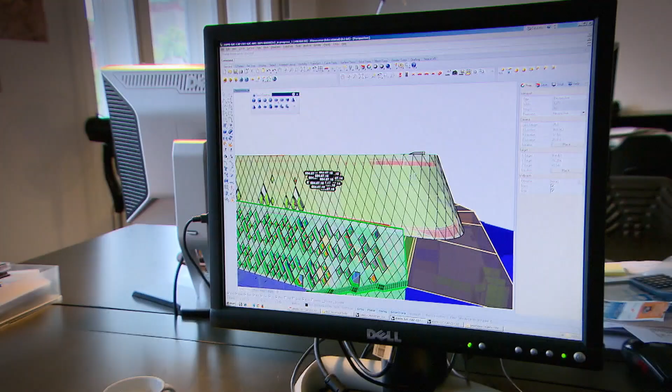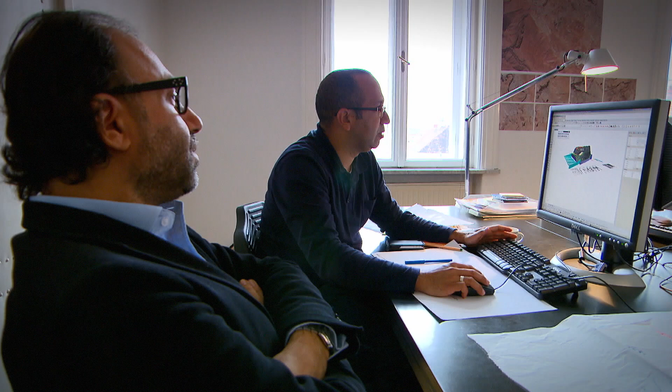The Emirates are a country that is actually quite open to new ideas. They literally hunger for them. They found our building design very refreshing, and made in Austria is something they equate with superior quality, as something of good quality, as a novelty.

Sustainable building is a well-established tradition in Austria, but Abu Dhabi is just beginning to recognize its importance for the future. In the Emirates, the issue of sustainability is linked to the country's poor reputation for having a large carbon footprint. We remember seeing billboards on the streets that said, 'We have the largest footprint,' so it's not something they're very proud of.

The United Arab Emirates is one of the 10 richest oil countries in the world. Where small villages stood a mere 50 years ago, booming metropolises now rise. Within a single generation, the Bedouins and pearl divers of yesterday have become business people and bankers.

Of the 8 million people who live here, only 1 million were born in the Emirates. They are well taken care of, paying no taxes and receiving many benefits from the government, sometimes even money, cars, or homes. But allegiance, money, and social peace must last after the oil is gone, and steps are already being taken. While Dubai is focusing on tourism and commerce, oil-rich Abu Dhabi is also pursuing renewable energies.

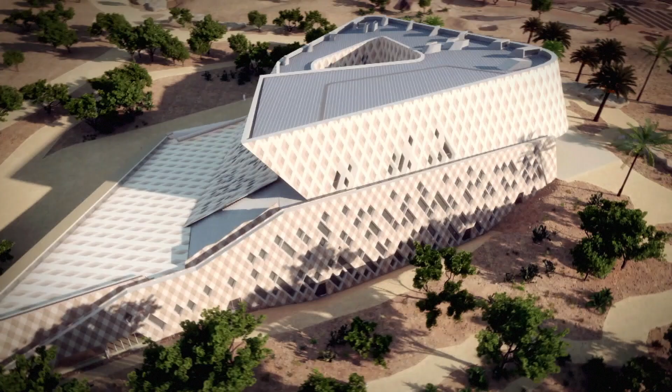The vestibule is beautiful. It always stays nice and cool, despite outside temperatures of up to 50 degrees Celsius in summer. This is due to the pleasant draft, even during wind-still conditions. We designed the vestibule to have these thermal qualities because we knew there could be a large number of visitors gathered here at times.

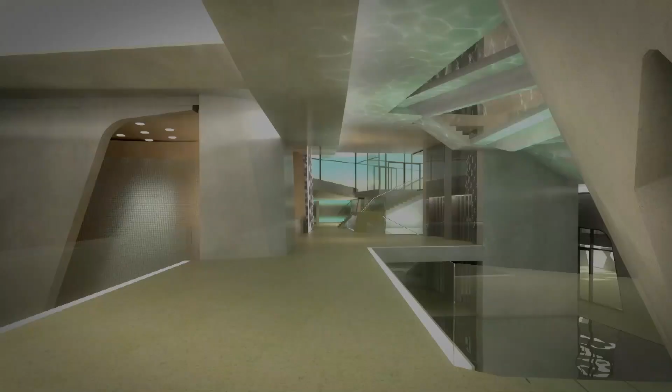Twisting 20 meters up into the sky, the building resembles a walk-in sculpture. Prior to planning the building, the architects studied the topography and culture of the region, as well as the latest international urban development concepts.

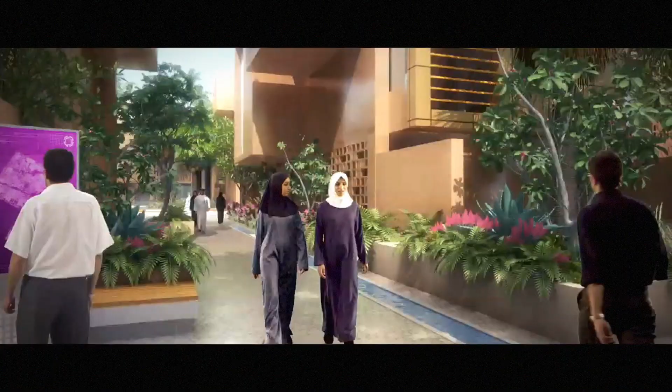Regarding the city of the future, I observe two tendencies here. One tendency is that there are two tendencies regarding the cities of the future. The first is the attempt to reshape megacities into lots of small units or little villages—the city as an agglomeration of many compact and manageable areas, with pedestrian zones and short distances to get around. On a larger scale, however, these areas are still interconnected.

The other tendency we've noticed is the rise of city marketing, where each city is trying to position itself in the world.

The Chalabi brothers lived in France, Geneva, and Baghdad with their Iraqi parents before moving to Austria. They studied architecture at the Vienna University of Technology and later taught it there as well. In planning the museum, they relied on a number of innovative building technologies that were developed and tested in Austria.

But will they work in the desert?

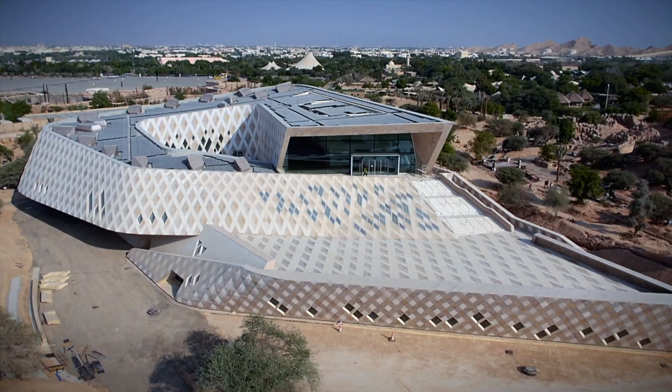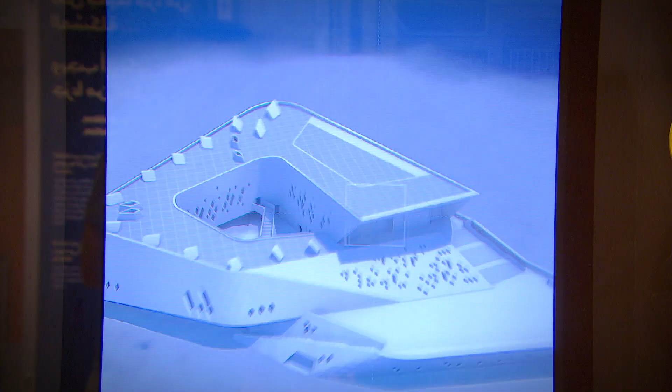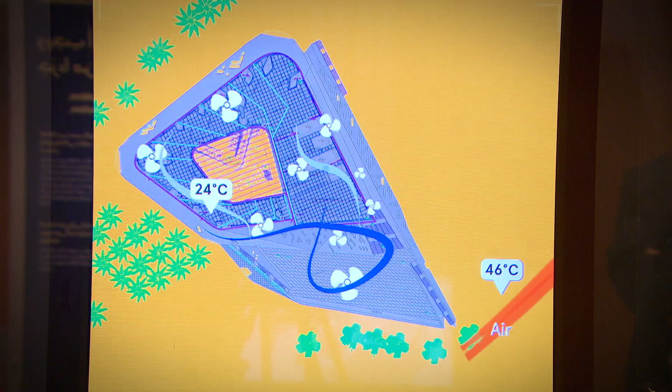The biggest challenge is protecting the museum against the scorching heat. For this reason, a third of the building is set deep below the desert sand. The supply air for the ventilation system is pre-cooled underground using 9 pipes measuring 800 meters in all, as well as a geothermal heat exchanger. The 25 megawatt hours of annual electricity savings derive from a method that has long been applied in Austria, although there it is used to preheat air.

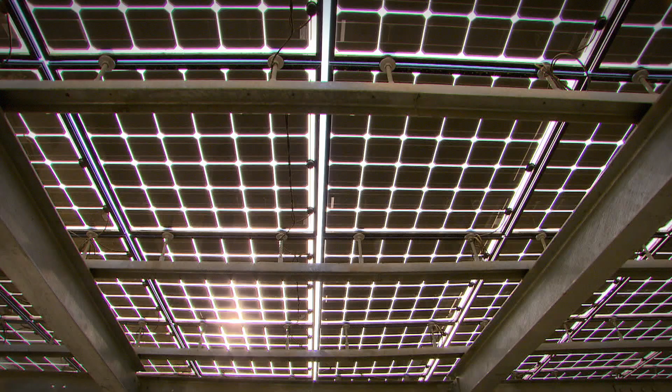The lighting design and building simulation, the photovoltaic modules, the solar collectors, as well as the building's technical and electrical equipment - all of these components were developed and supplied by Austrian companies.

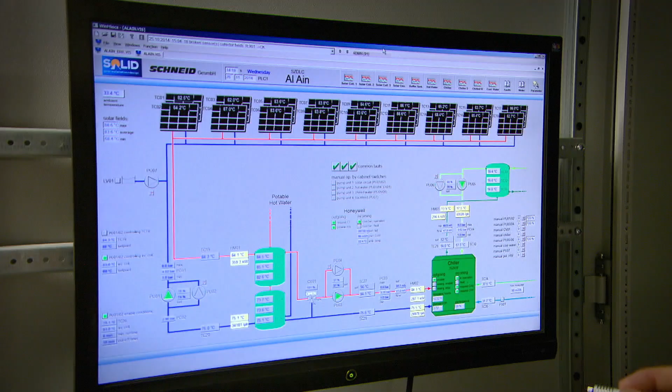The museum is air-conditioned using solar power and a cooling system from Styria. The boiling hot water from the solar collectors drives the chiller, where cold water is produced and then pumped through a network of pipes in the ceilings and walls.

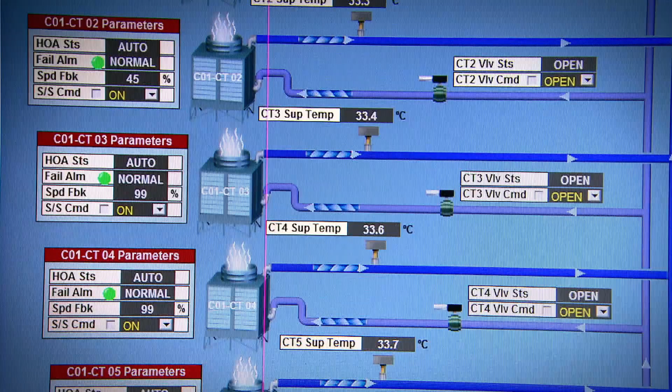The architects have managed to harmoniously balance innovative high-tech solutions and traditional elements in the new building.

Emiratis perceive the building as nearly traditional. We've even heard them say it reminds us of our values and building styles. And that's fitting because we adopted many elements from the traditional architecture and then just put them into a new package.

The museum is still in trial operation, but will open soon. Already, the Desert Learning Center is viewed as a model building for the cities of tomorrow.

Sustainable construction used to be a niche topic, but today it is a hot issue everywhere. IRENA, the International Renewable Energy Agency, has its headquarters in Abu Dhabi. Established in 2009, IRENA's mission is to promote renewable energies for the cities of the future.

You have a situation where you have half the world's population living in 2% of the world's land, consuming 75% of its resources. This is a transformative moment of global change that requires a response which is equal to the scale of the change that we are seeing.

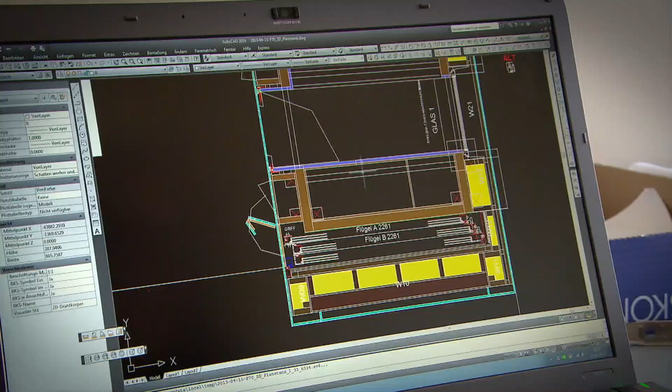But what does a city of tomorrow look like? Especially in the buildings sector, there is an immense potential for savings. Researchers and students are therefore focusing on developing plus energy houses, or buildings that generate more energy than they use over the course of a year.

Students at the Vienna University of Technology are designing such a plus energy house. Their intention is to compete at the world's preeminent green building competition, the Solar Decathlon in California.

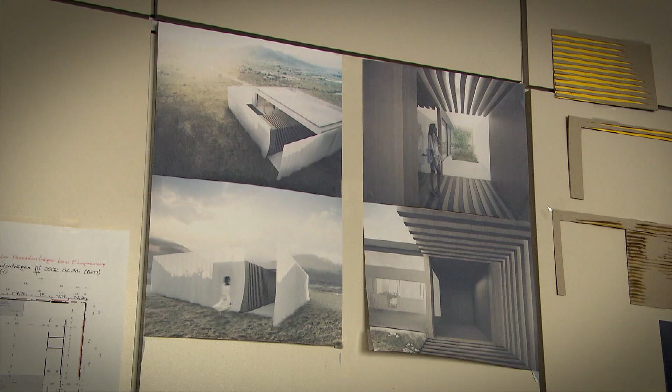Participating in this competition is very rewarding for the students. They don't usually get to build a house from start to finish, but now they're involved in all phases: planning, designing, building, furnishing, and even presenting it.

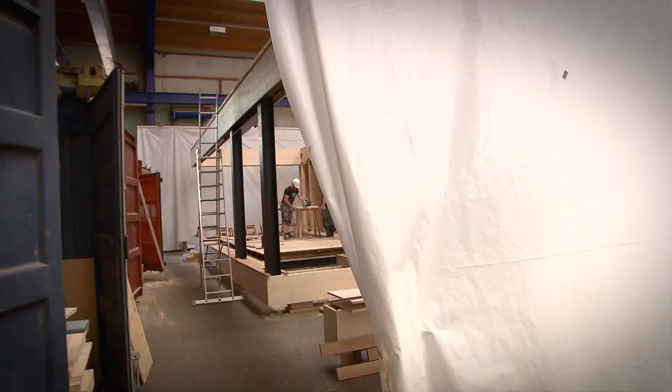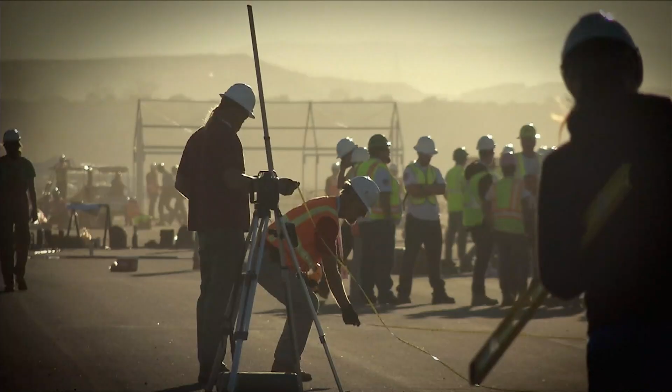The students are prefabricating their house in a construction hall in Carinthia. They must build it on their own, as prescribed by the strict competition rules. The wooden house is then shipped in containers to Irvine, near Los Angeles, where the Solar Decathlon is held. Now consisting of 48 students, Team Austria has only 9 days to assemble the house.

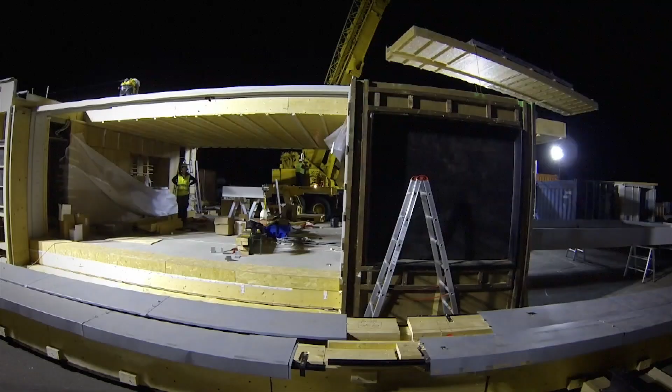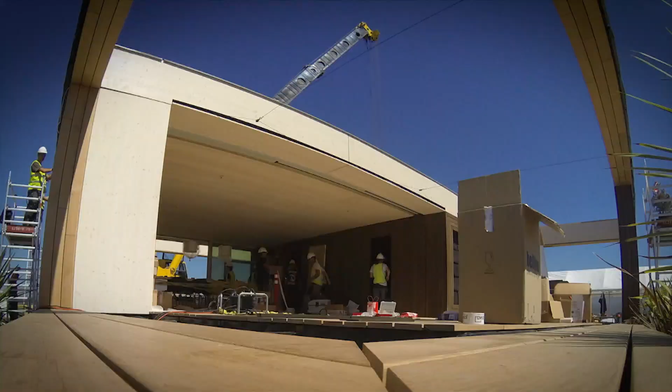The Solar Decathlon is a competition patterned after the Olympic decathlon, but for futuristic solar homes. Out of 150 university teams from around the world, only 19 have made it to the finals. It is the first time ever that an Austrian team is participating.

The Solar Decathlon is the world's preeminent competition for sustainable building, and many Americans wouldn't want to miss it. What they get to see here is definitely futuristic: modular homes whose components slide apart on rails, houses that look like tin shacks or haystacks, but which are actually technical masterpieces. In all, 300,000 visitors will take a look at these homes of tomorrow.

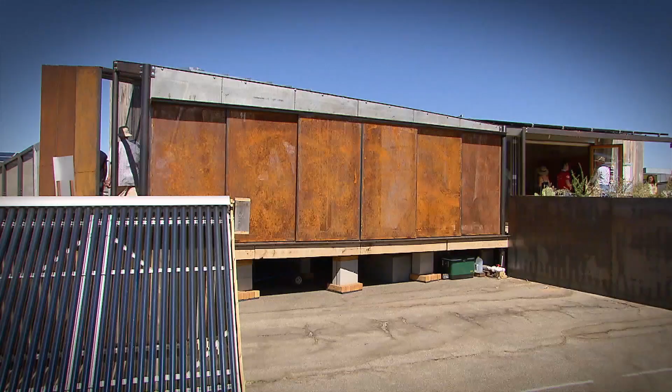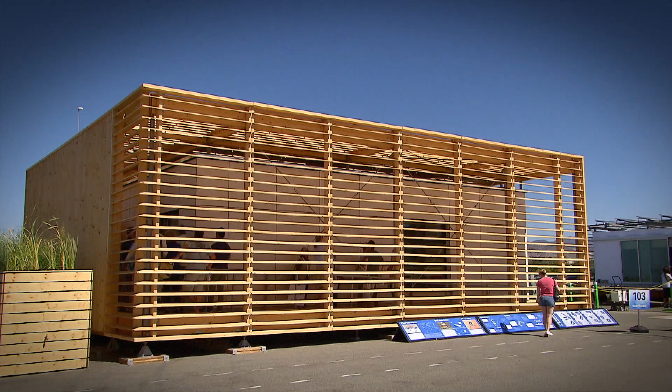The U.S. Department of Energy organizes the competition, and only students may participate. During the next several days, the teams will compete in 10 different disciplines. The vision behind the students' work will now be put to a practical test.

And now you can take a look inside. The Austrian team's house can be used as a standalone home or within compact urban development areas, and it is well received.

People seem to love it, and some even want to move in. Many have asked us if they could buy it. We already had 900 visitors this morning. Everyone was very enthusiastic, which is great, because we put two years of hard work into it.

We're ranked somewhere in the middle right now, but there are more contests to come, and we should do quite well in those. During guided tours of the house, the students impart their knowledge to the attentive visitors.

If you look at places like California, which is one of the most innovative places in the world in terms of technical learning, in terms of governance structures, in terms of how cities are organizing themselves, they are feeling the pressure from energy and water. But then you see in other resource-rich areas where that pressure hasn't yet come to bear, cities feel they can postpone the change. But it's only a matter of time before it comes. My advice to them would be that if you defer change today, it's going to be much more expensive and painful further down the road. We need to act today.

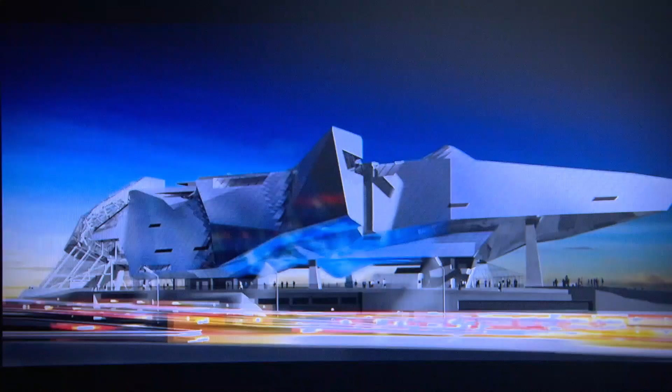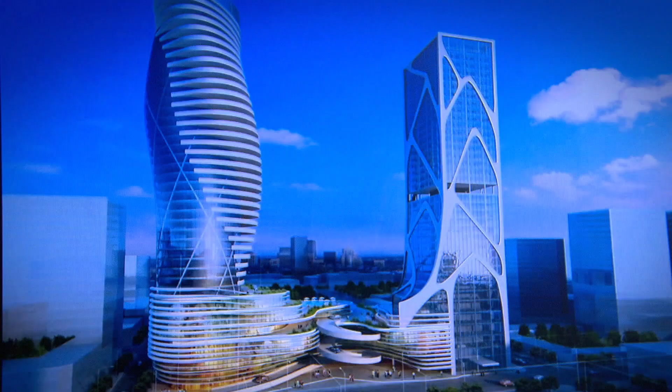Renowned architectural firms the world over are working on concepts for redensifying our cities. A key goal is to make not only individual buildings, but entire urban quarters into energy producers.

The Viennese firm Coop Himmelblau, too, is investigating ways to stop urban sprawl in Los Angeles, while at the same time generating renewable energy.

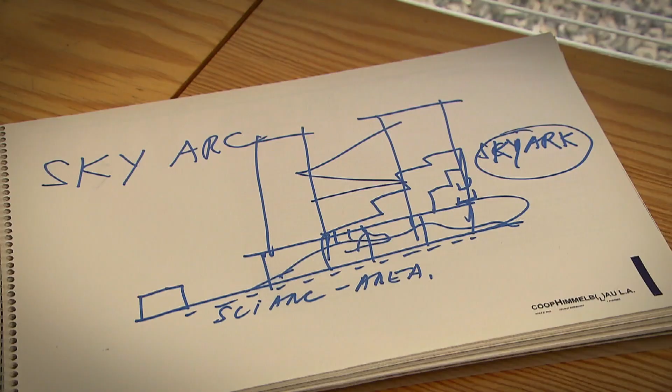The idea is to create small hubs that supply their surrounding area with energy. These energy hubs will function like small city power stations. In the lower zones, we use geothermal energy. And in the next layer, we use the sun, especially solar thermal energy, to generate heat. This is possible on the available surfaces of balconies and on south-facing building facades.

Then there's the layer where we make use of the sun to generate electricity with photovoltaic cells, for which the buildings are optimally positioned. And in the highest layers, we use the wind to generate electricity because that's where the highest wind speeds are found.

Urban planners from Los Angeles even came to Graz to take a look around. Here, less than 2 kilometers from the city center, 2 new urban quarters are being planned. Hans Schnitzer, the research coordinator, explained the concept to the US experts. In Graz, too, the plan is to redensify the city.

On an international scale, Graz is only a small city, definitely not a megacity, but we also face significant challenges. The current population is around 280,000, with another 3,000 to 4,000 people moving here each year. So by 2050, we can expect the population to grow by 100,000. That's 100,000 more people in need of living space, jobs, and utilities. And if we don't plan ahead, it will also mean around 70,000 more cars, which is simply inconceivable.

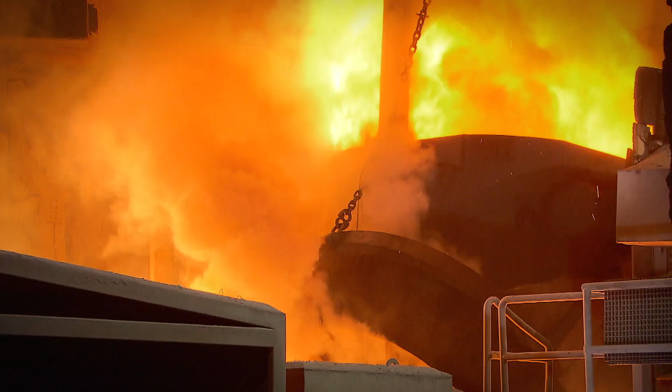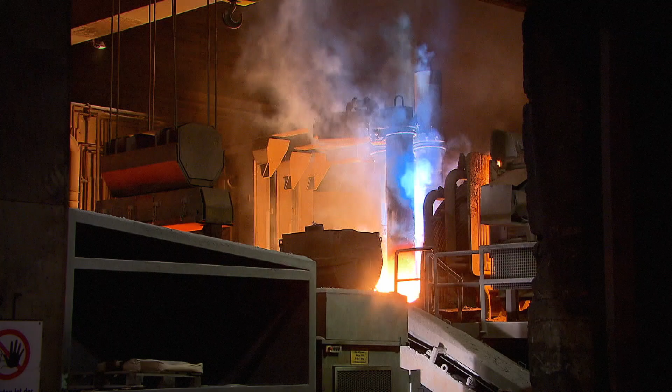A good precedent already exists: the Marienhütte steel and rolling mill in the center of Graz. Virtually unnoticed by nearby residents, the mill turns scrap metal into 400,000 tons of steel annually. As an eco-profit enterprise for more than 20 years now, the Marienhütte generates only a small amount of emissions and waste. Materials are recycled and reused, and the mill ultimately benefits all residents of Graz.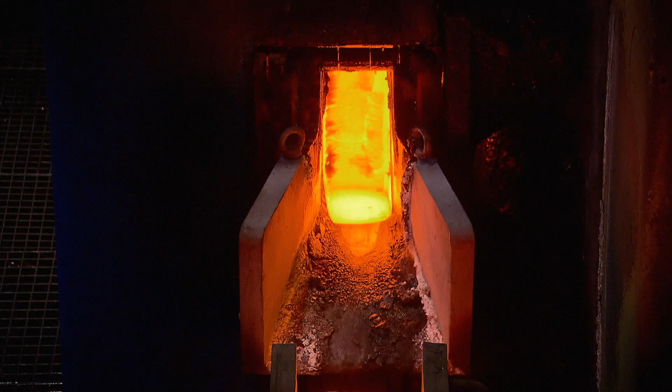An innovative energy model was developed to feed waste heat from the steel plant into the district heating network. In the future, the mill will also supply the entire Reininghaus district and its 10,000 homes with heat.

The boundaries between city and countryside are becoming increasingly blurred. Green and industrial areas, energy generation, and residential life, work, and recreation will all be integrated within the new cityscapes.

We're trying to create an entirely new city quarter with a main street, a main square, a park, and nearby job opportunities.

I find jobs so important because we want people to stop using their cars. They should be able to say, I don't need a car. I can walk to work, walk or ride a bike to take the kids to kindergarten, and walk to go shopping. So we're planning in a very integrated fashion.

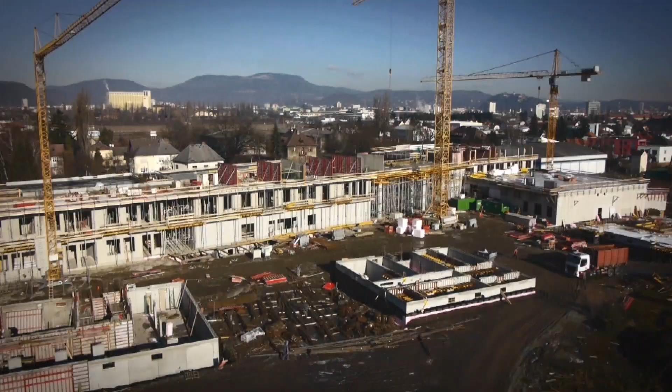Construction work is already underway on Graz's new CO2 neutral and energy self-sufficient urban quarter. The office and shopping complex being built along the main street will shield the residential buildings behind it.

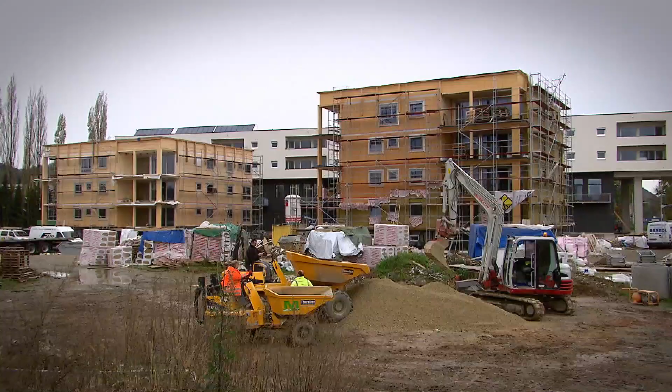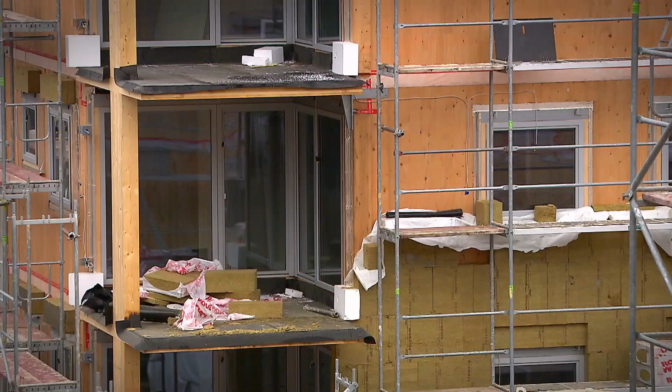The project features many innovative ideas, like the design of the family homes. They are made of multi-level prefabricated wooden modules. The residential and office complex will generate more energy than they use. Together, they will form a surplus energy cluster.

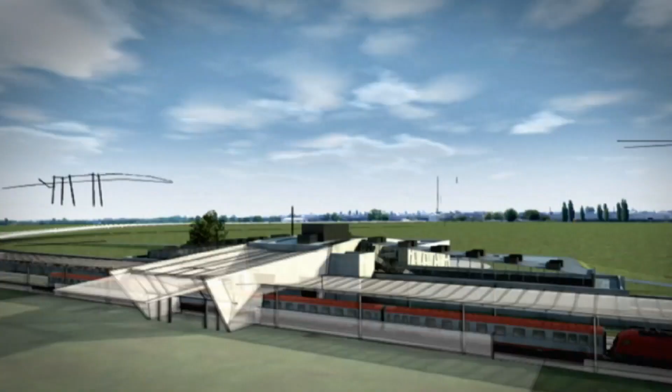In Vienna, too, the city of tomorrow is taking shape. Here, where the subway currently traverses green fields and nurseries, a new densely populated urban quarter will soon be built.

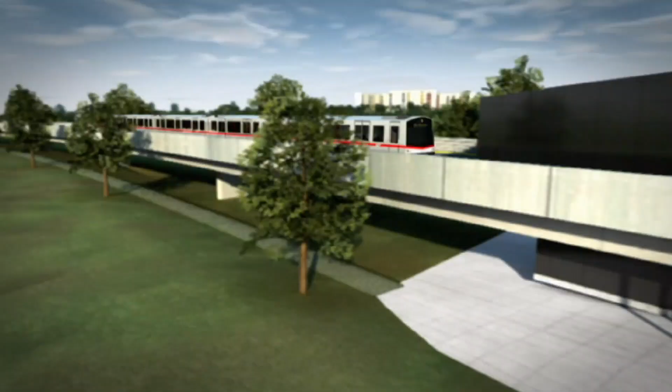From downtown Vienna, it takes only 22 minutes to reach Seestadt Aspern, Vienna's urban lakeside. Within the next 20 years, new homes will be built here for 20,000 people and 15,000 new jobs will be created.

The initial phase of construction is finished, and the first Seestadt residents have already moved in. This is the most significant expansion program undertaken by the city of Vienna since the late 19th century, and one of the largest urban development projects in Europe. Completion is scheduled for 2025 at the earliest.

Transforming an existing city into a city of tomorrow is indeed a long process. A number of factors must be considered and integrated: innovative building technologies, renewable energies, new mobility concepts, job creation, and adequate industrial and recreational areas.

While residents of smart cities will find living with modern technologies to be quite normal, a new generation of researchers is already advancing the concept of sustainable building even further.

Competitions like the Solar Decathlon in Irvine demonstrate what is already possible today. The rules for each event are very strict.

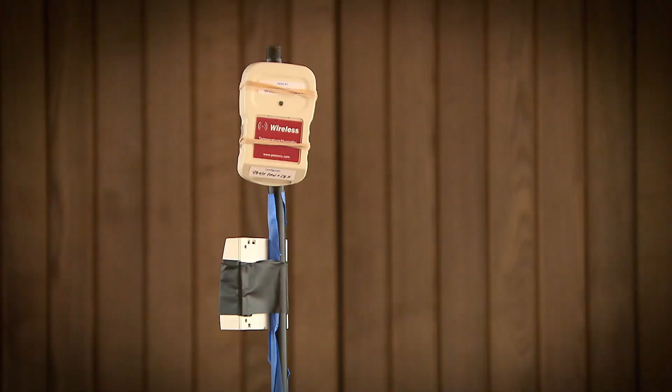They specify exactly how many people may be in the house, as well as the locations where sensors must be located—one in the living room and one in the bedroom. And everything is checked very closely.

The students' futuristic solar homes are tested for 10 days to see if they meet the practical demands of everyday life. Ready? Go.

Judges inspect the functionality and energy consumption of appliances and PCs, the house's energy balance, and the temperature and humidity inside the rooms. No detail escapes the scrutiny of the officials. The houses are evaluated for innovation, marketability, architecture, and functionality.

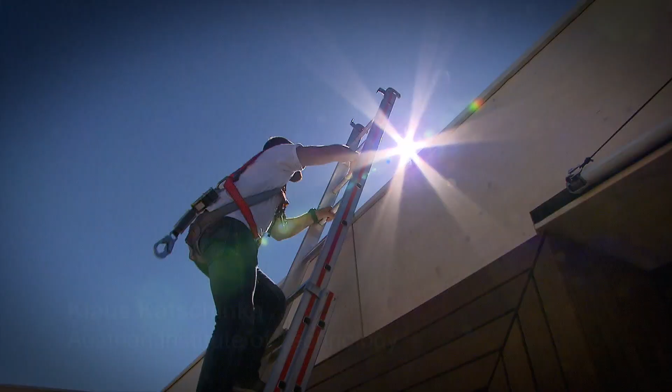The main idea behind the Solar Decathlon is to generate more energy than we use. The photovoltaic system on the roof is rated for 8.6 kilowatts peak. And as you can see, the weather is beautiful, so we're generating a lot of electricity. We have to make sure we don't use more power than the photovoltaic system is generating.

Nighttime in Los Angeles. Commuters are streaming home to the suburbs. But for the Solar Decathlon participants, it is still a long way till knocking off time. Tonight they must host a dinner party that is part of the home entertainment category for testing the house's living comfort.

The Austrian students serve their guests, six students from a competing team, who will grade the meal and ambiance. The suspense is growing for the students. Which team has built the best house of the future? The soon approaching grand finale will tell.

The day has arrived. More than 1,000 students excitedly await the judge's decision. And now it is my great honor to announce the first place winner of this Solar Decathlon, the 6th in history in the US, Team Austria from Vienna, Austria. The first Austrian team ever to participate has managed to come out on top, with a score of 952 points out of a possible 1,000, winning the preeminent Solar Decathlon Prize.

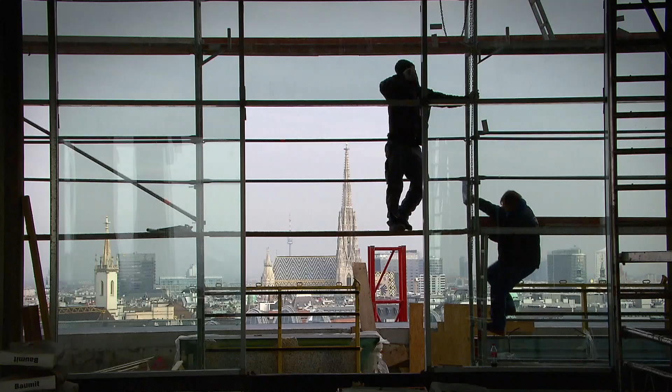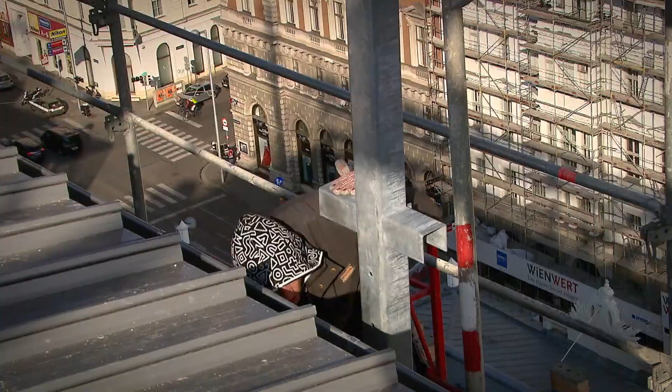Cities are being redensified and new energy-efficient homes are being built. But what about existing buildings? A pilot project in Vienna may have the answer. The University of Technology's rundown chemistry building is being converted into the world's first plus-energy high-rise.

We're standing on the roof, and above us is the 600 square meter photovoltaic installation. There are also photovoltaic arrays on the facades as one element of the plus energy concept. A second and absolutely essential element is to minimize power consumption. That will be the real challenge, using so little electricity for heating, cooling, computers, etc., that the building will actually generate more energy than it uses.

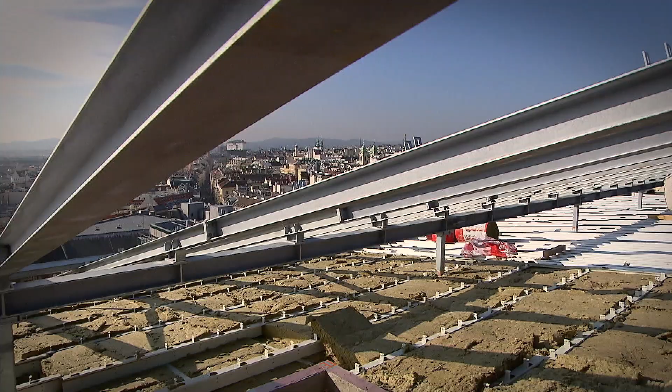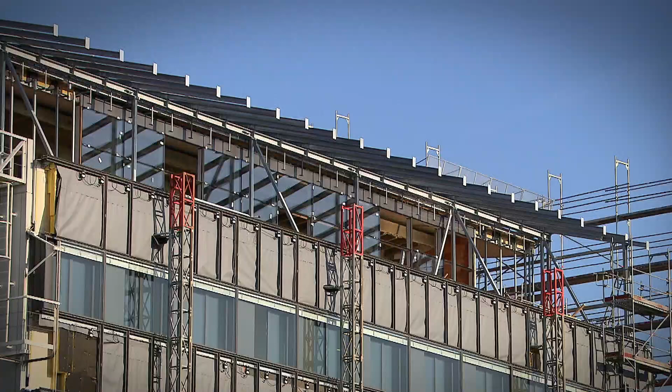Thick insulation is being installed on the roof and facades, and the 320 kilowatt peak photovoltaic power system will be the largest building integrated unit of its kind in Europe. Even so, there is not enough surface area for the system to supply adequate power for a conventional office building with 700 daily users. The solution? This conventional building must be made into a very special one by reducing its power consumption by an inconceivable 90%.

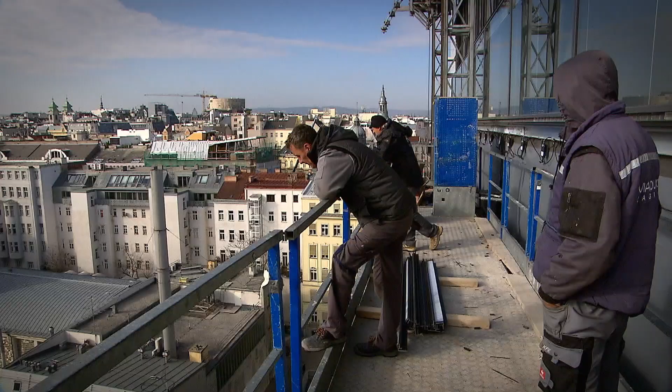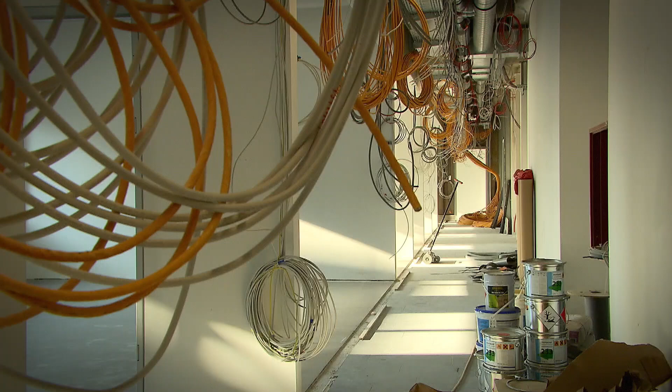From the ventilation system to computers and even coffee machines, only electrical equipment approved by the research team may be installed. Each device must be analyzed and either optimized or replaced with a more energy-efficient model. Altogether, more than 9,300 components.

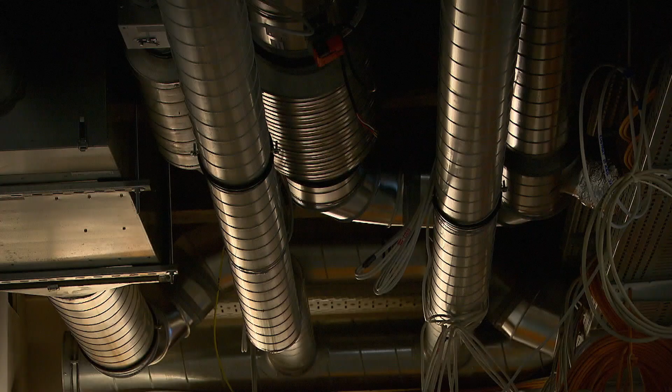The renovation of this Vienna University of Technology building is just one City of Tomorrow pilot project out of several hundred that the Technology Ministry is supporting. The program is helping Austrian researchers to expand their knowledge leadership in the field of sustainable building and to apply it internationally.

In Al Ain, construction work is almost complete, and the museum will soon open. Ten Austrian companies with a total of around 300 employees helped put up the building in 2 years of actual construction time. The architects give a few final instructions: this stone should not be water jetted, it just needs a little bit of brushing, that's it.

Austria has an excellent reputation in the Arab countries. Austrian products are held in high esteem, and the label Made in Austria is associated with high quality. Some Emiratis are already referring to the building as Made in Austria because it was built largely by Austrian companies. I think the transfer of know-how functioned quite well.

The offices are now occupied, but museum goers generally visit during the evening hours, so the greatest need for cooling is during a time when the solar air conditioning system is no longer operating. This tricky challenge, too, was solved with technological mastery.

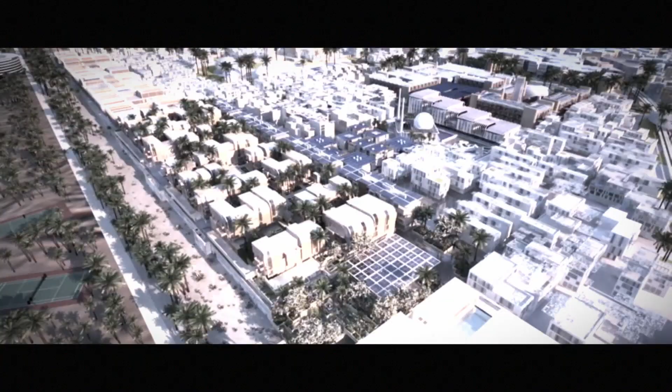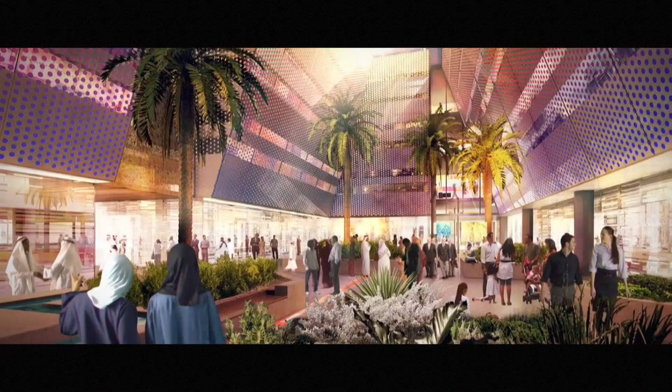Abu Dhabi is preparing for a future without oil, with an ecologically planned city in the middle of the desert, designed by European architects, supplied with renewable energy. This is Masdar City, an experiment, vision, and flagship project all in one. When completed, it will accommodate 40,000 inhabitants and 50,000 daily commuters.

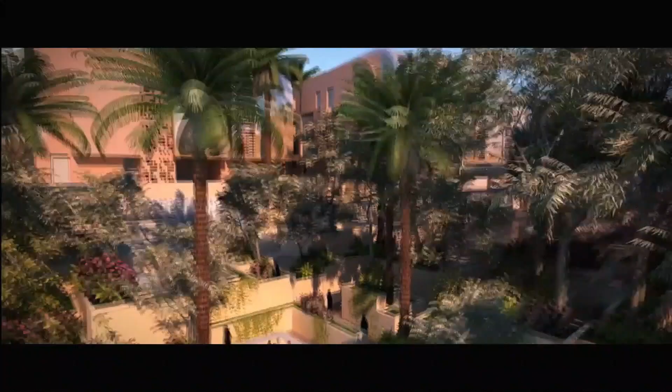The first part of the city has been built. It stands in defiance of the barren landscape. But behind the outer walls, there unfolds an urban oasis. The Arabic word Masdar means source, and the intention is for Masdar City to gain international importance as a source of knowledge.

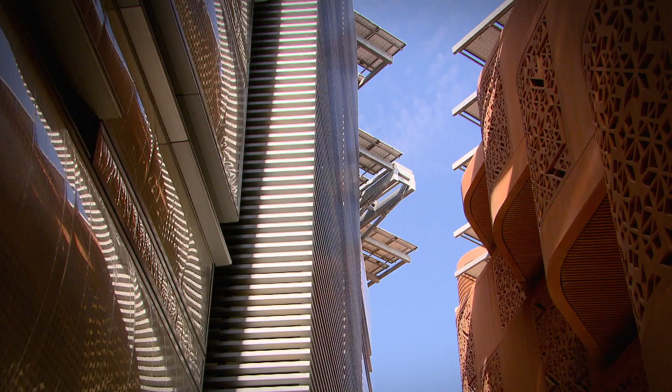There are no skyscrapers like in nearby Abu Dhabi. The buildings are 4 stories high. The main streets are 6 meters wide and the side streets 4. This allows the buildings to shade the city's outdoor spaces. It is 10 to 20 degrees cooler here than in Abu Dhabi. Urban heat islands are unable to form, and it is comfortable to spend time outdoors. Plenty of natural light reaches the lower floors, so energy is saved for lighting and cooling alike.

The master plan as a concept is really based on a study of the environment itself in terms of the solar patterns and the way the wind moves through this area. So, for example, the whole orientation of the city is on the northwest axis, and that's because for the majority parts of the year, the air movement in this area comes from a northwesterly direction.

Alignments of streets and openings are carefully orientated to capture this wind. If we can make ecologically sound living possible here in the desert, then it is possible anywhere. This is the credo of the city planners.

Research is heavily emphasized, and the university occupies center stage in the ecological city. We've been able to attract over 2,500 applications from all over the world. We currently have 491 students from 60 countries worldwide. We have graduated, over the past 4 graduations at Masdar Institute, 307 students. All of our students are prepared to be the future leaders, critical thinkers, problem solvers, and innovators in the advanced technology and sustainability fields.

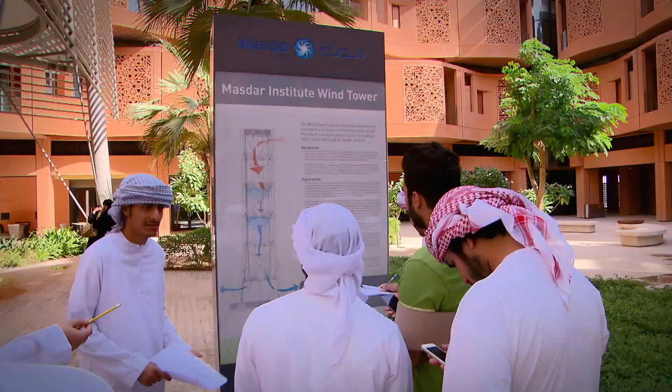Visitors are fascinated by the power-generating systems on the roofs and by the wind tower. The tower catches the wind at a height of 40 meters, then humidifies and cools the air before guiding it to the courtyard. The wind tower is already a city landmark.

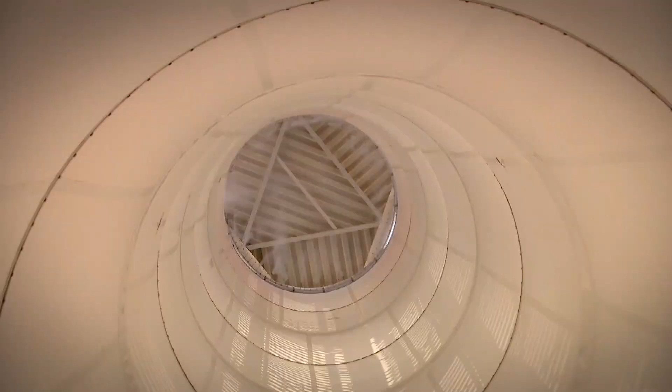Particularly among young Emiratis who grew up amidst unimaginable oil wealth and excess, concepts like climate-friendly building and the use of renewable energy are viewed as quite new and progressive ideas. But Austrian students are already a huge step further.

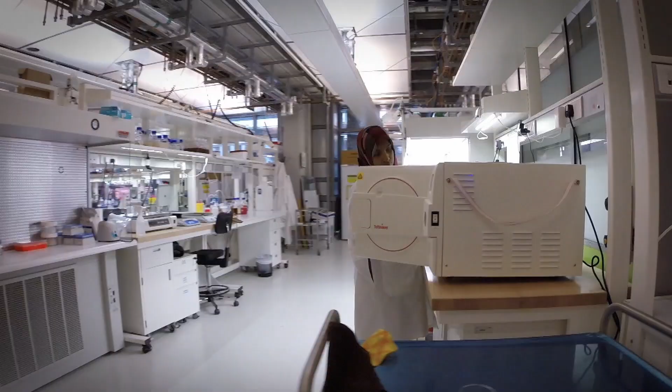After studying physics and environmental sciences in Graz, I decided to get a master's in sustainable development. I spent a semester in Hiroshima, Japan, where I became interested in sustainable urban planning. Now I'm specializing in water management here in Masdar. It's really quite fitting because Austria values its water resources, and I can apply this knowledge when I get back home.

Masdar City is not the only experimental city, as other futuristic urban planning concepts are being tested around the world, including in Austria—even if this one may not appear futuristic at all.

In idyllic Köstendorf near Salzburg, the new energy future is already underway. Since 2009, the town has been part of a pilot project, and the inhabitants are very eager test persons for jetting around in electric cars.

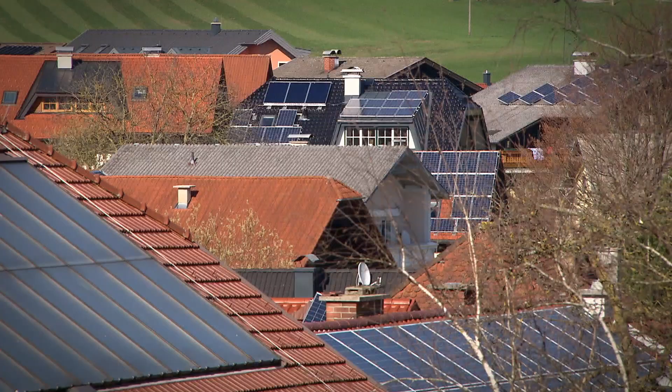The electricity for their cars and household appliances is self-generated inside the test area. There are 43 photovoltaic systems installed on the rooftops, with a total peak output of 200 kilowatts.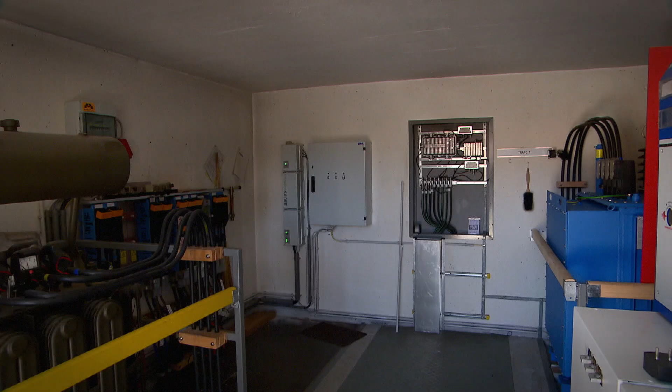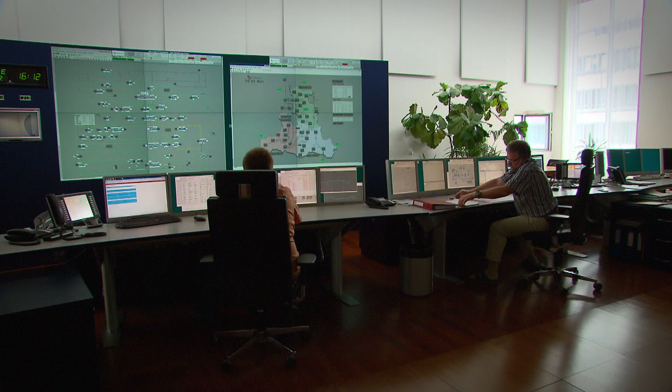Köstendorf is the first smart grid model city in Austria. The project was made possible by a series of technological advancements, of which the smart regulator plays the central role. It controls, like a conductor, the town's orchestra of electricity generating and consuming components to ensure smooth operation of the power network. It is a formidable challenge, as an increasing number of small solar, wind, and water power generating systems must be coordinated with large power plants.

Renewable energies have many advantages: no CO2 emissions, coming from renewable sources. But there's also a disadvantage—their generation cannot be controlled or planned. We can only use renewable energy when nature lets us.

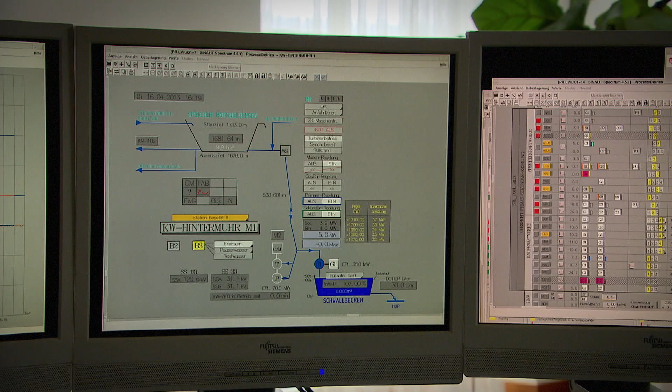But at the same time, we need to make sure that our customers have a secure supply of power. No one wants to watch TV only when the photovoltaic system is producing electricity. So, balancing the supply and demand for renewable energies is at the core of the smart grid concept.

In Köstendorf, the new smart grid technology is being tested in daily life. The Struber family operates a wholesale business and post office partnership.

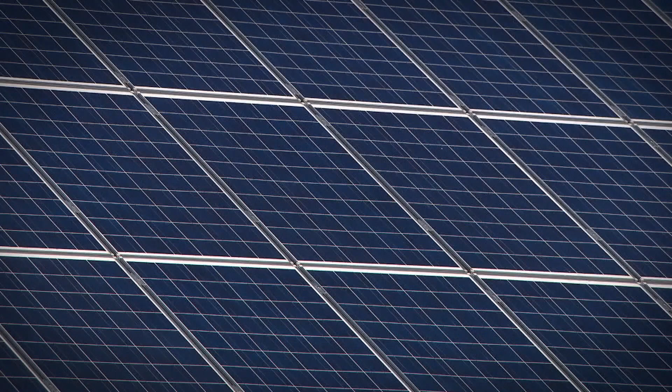Every electrical device feeds its data to small metering and management units that control power usage inside the building. The electricity used in the house and to charge the cars is self-generated, and the cars also provide buffer storage for the photovoltaic system. Excess electricity is fed to the grid. The use of intelligent control technologies is not only ecologically prudent, it also helps eliminate the need to build new power plants and supply lines.

We have two systems installed, so we can use one to power the lighting and computers in our company. It's great because we get to use about three quarters of the electricity that's generated. The second system we use for our private household.

Salzburg is among the European pioneers in smart grid development. The aim is to use the experience gained in Köstendorf to completely overhaul the power system.

The power industry is going to experience the same sort of rapid development that the telecom industry has undergone over the past 20 years. When I think back to 1990, everyone was still sharing an analog phone line with the neighbors, and sometimes you had to wait forever to make a call. But today, we always have our smartphones with us, and we can call or access online information just about any time we want to. And like the telecom industry, revolutionary change is coming to the power industry.

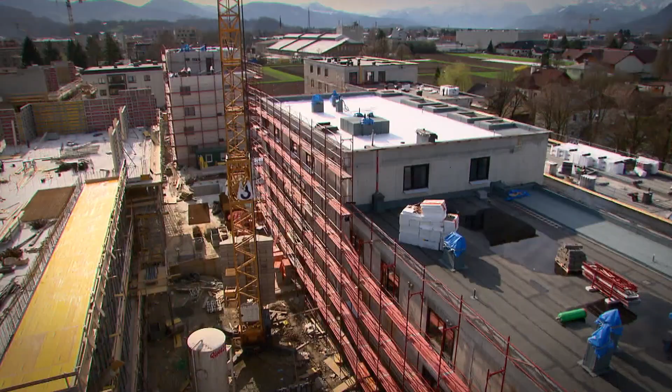Just a few bus stops away from the center of Salzburg, in the Taxham district, the future looks rosy indeed. The housing complex being built here is aptly called Rosa Zukunft, Rosy Future.

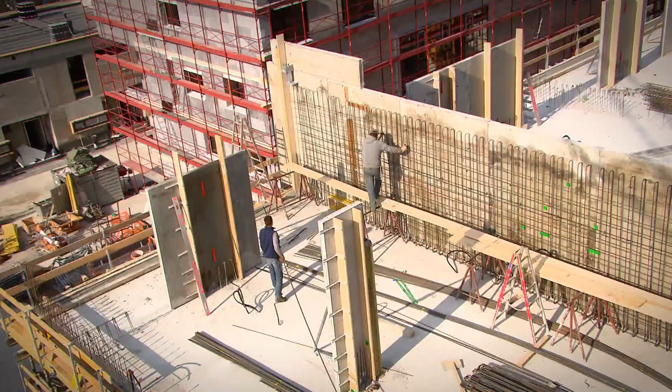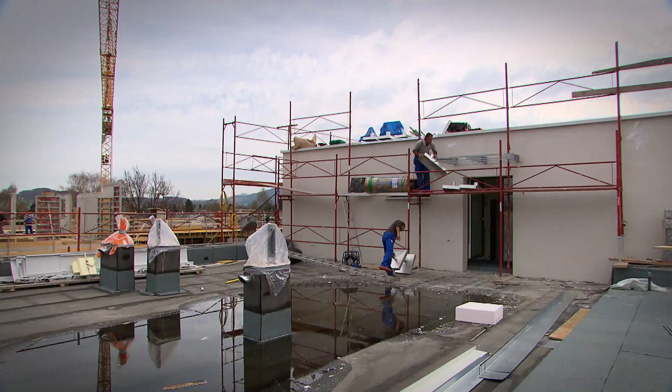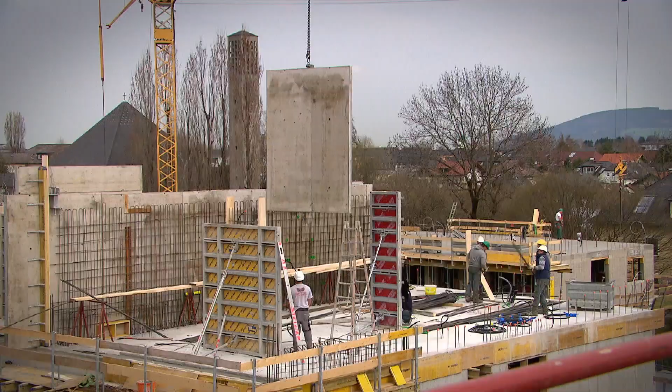The entire spectrum of renewables is being put to use: solar power, heating pumps, hot water accumulators, a combined heat and power plant, and district heating, all coordinated using smart grid technologies. There is also an innovative mobility concept, including car sharing and electric vehicles, and a well-planned social concept, upon which the project's success hinges to a great extent.

The technological future will be significantly easier to manage than the social future. That's why the Rosy Future project has a component that we refer to as reclaiming social capital. We want to bring people back together. The architectural concept fits this idea, as does the common goal of using energy efficiently.

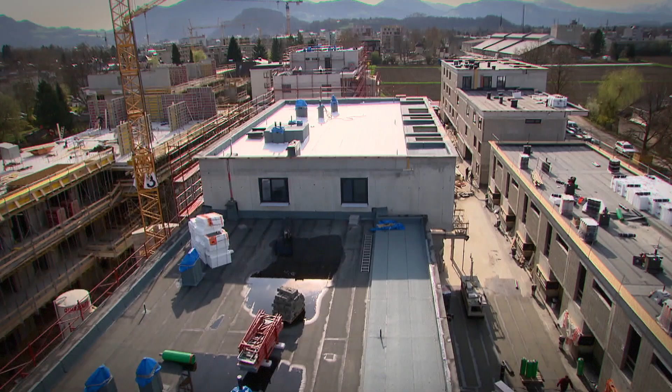I think it will turn out how we imagined. We've formed the right basis. The ecological and social components are in place and can be lived out in a neighborly fashion. We can only observe what happens once people move in, but the basis is there.

The pilot project has been completed. For the allocation of homes, a priority was placed on achieving a representative social mix. The Rosy Future Complex offers homes for young and old alike, including affordable and luxurious units. Life within the community appears to be harmonious.

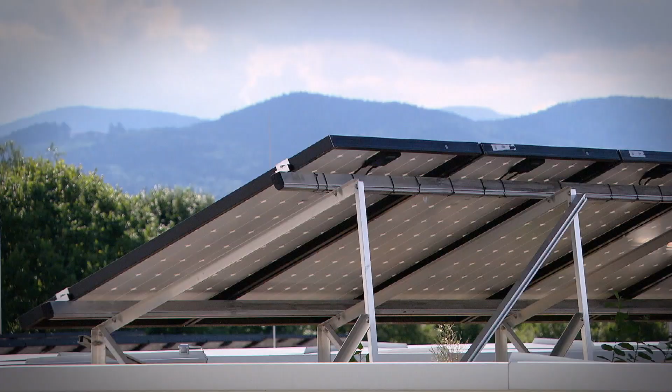After the first year, it is also clear that the mobility concept has not caught on, but the energy concept has. The technical innovations, the use of renewable energy and smart grid technologies have all been inconspicuously integrated as a normal part of daily life. Residents can keep track of when it is cheapest for them to use electricity and have saved around 15% in energy costs during the first year.

In Graz, too, the planners' aims have been fulfilled. The first housing complex in the Reininghaus district has been completed. A total of 12 residential units are connected with the office and shopping complex, together forming a surplus energy cluster.

The residents are happy with their eco-houses. Undoubtedly, Graz Reininghaus will serve as a model international project for how to design a modern, energy self-sufficient urban quarter.

In Vienna, the university's chemistry building is also shining in new splendor. It is the world's first plus energy high-rise. Renovation is complete and daily student life has resumed. The building's solar power system supplies it with electricity, and waste heat from the server room and elevator braking system are also being used.

Countless innovations are tied to this pilot project. Lighting, computers, and telephone systems were all found to be power guzzlers and were redesigned as a result. Power consumption was cut by an astounding 93%. More than 9,300 components were optimized.